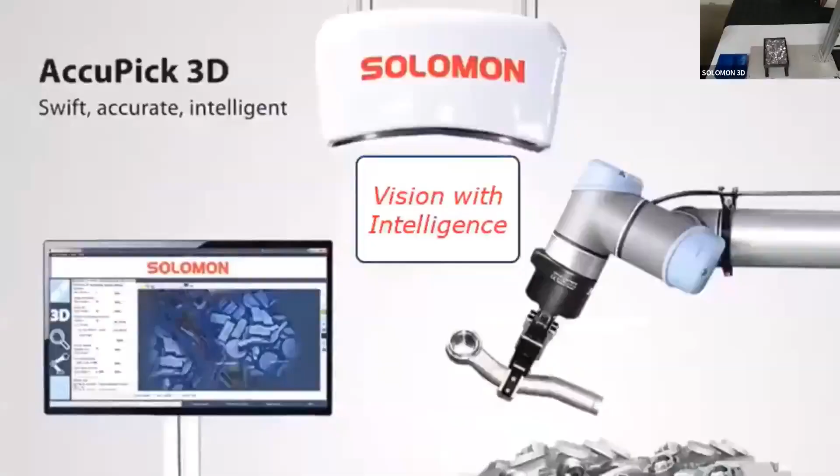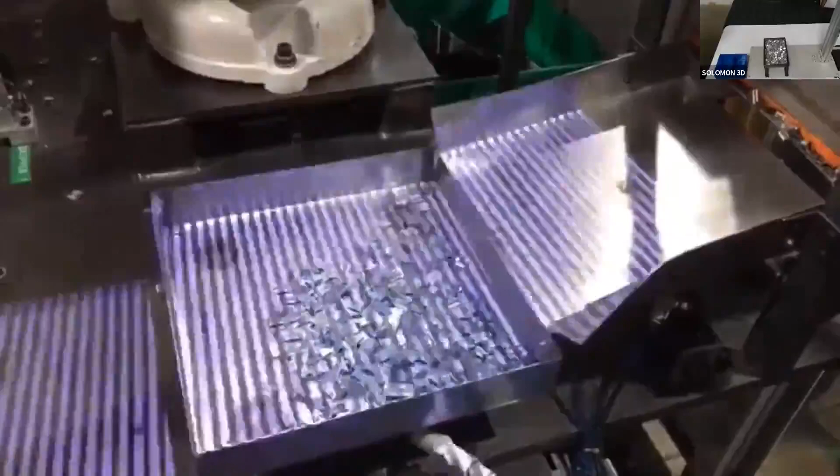As you can see here, we have a shaker system that's feeding parts into a feeder. What's happening is we have a scanner, a Solomon stereo scanner mounted on the top right here. It's a 2.3 megapixel, 12 millimeter scanner, and we have our scanner integrated with a PLC. In the next video, I will show you how the whole setup works.

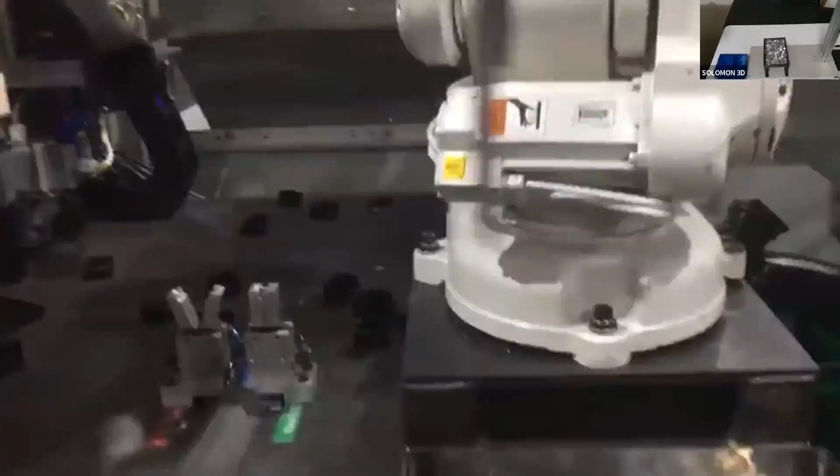Here we have a scanner that's taking a scan for each cycle. These parts are shiny and reflective, and our Solomon Vision system is able to accurately get good point clouds and picking positions. While the robot is out of the way, it's taking images so that we save any downtime with vision.

In this second station, it's basically a station to reorient the part and place it in the plastic mold right there. The part has to be placed in this mold in the same orientation each time. Then the plastic mold moves on to final inspection and is dropped off in the chute.

So right here, I'm going to be replicating some of this today in the webinar and going over AccuPick, our software, and show how we set up this project in our software.

Solomon is a company with 50 years of experience, and our vision systems department was opened in the last 5 years. We've gotten the Vision Systems 2019 Innovators Award because of the ease of use and flexibility, being able to use multiple camera types and integrate with multiple robot brands.

Our software is also able to perform different applications. We are in the energy and power industry, system integration, automation, robotics, and a bunch of other industries. Our offices are located in Taiwan, China, and the US.

So me and my colleagues are based in Los Angeles and Detroit, and we have Thailand and Vietnam. We have headquarters located in Taiwan, which is where AccuPick was initially developed. As you can see here, we have a global network. We have customers all over the world, in Europe, the US, North America, South America, Asia, and we are only growing and expanding with time.

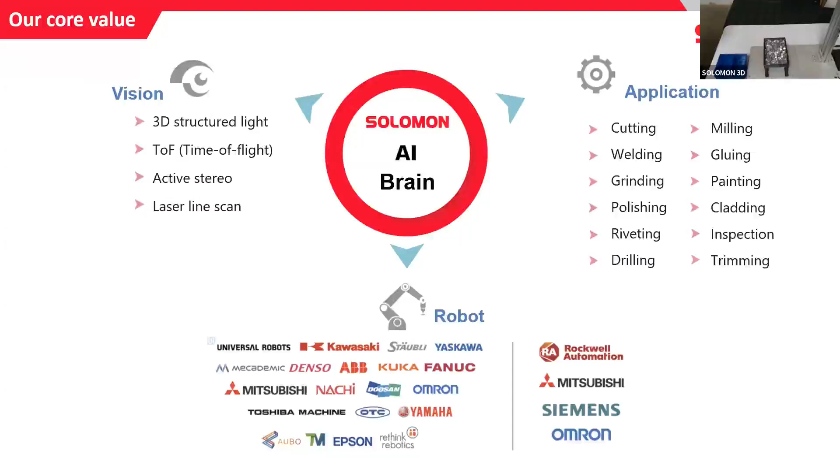In this slide, I'm going to explain what our different applications are. Today, I will be using AccuPick 3D, our random bin picking solution, to show how we did the application in that video for Mergon.

Our other applications are Solmotion, which is our vision-guided robots application for tasks such as gluing and polishing. Solvision is our application for AI-based inspections, such as looking for defects and irregularities. Solscan is just our 3D scanner, our Solomon 3D scanner.

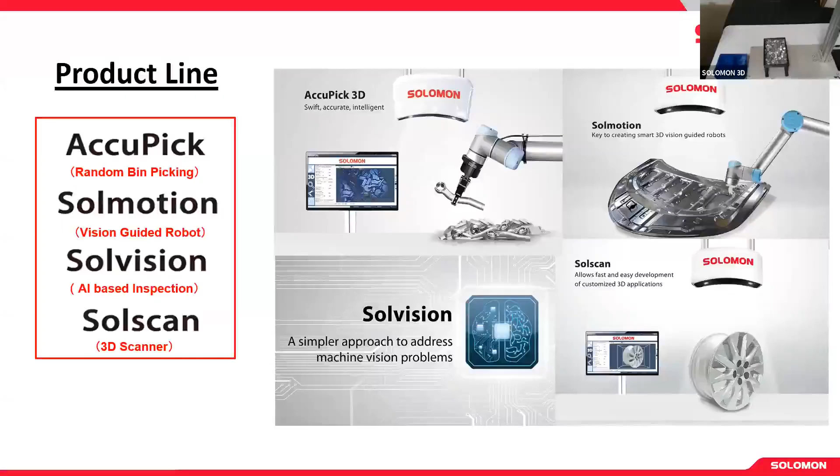So let me now show you our AccuPick interface and get right to it.

Okay, so here is our flowchart of how we set up this project. We start with a capture block. Our capture block essentially is our camera. It's taking in the information, basically capturing the bin of parts and taking in the point cloud, the 3D point cloud information.

Then we move on to the PickDrop block, which is basically setting pick and drop settings for the robot so that we customize it to our needs. Our recognition block is where the heart or soul of our software is, basically our AI. This is where we train parts, basically teach our software what a part is and what exactly we want it to detect, and then train our AI model through deep learning. Our filters block is just where we set parameters to get the best pick point.

And I will go through each of these blocks in depth. Our robot script block is where we set our missions for our robot and waypoints, and customize it to be the best for the application.

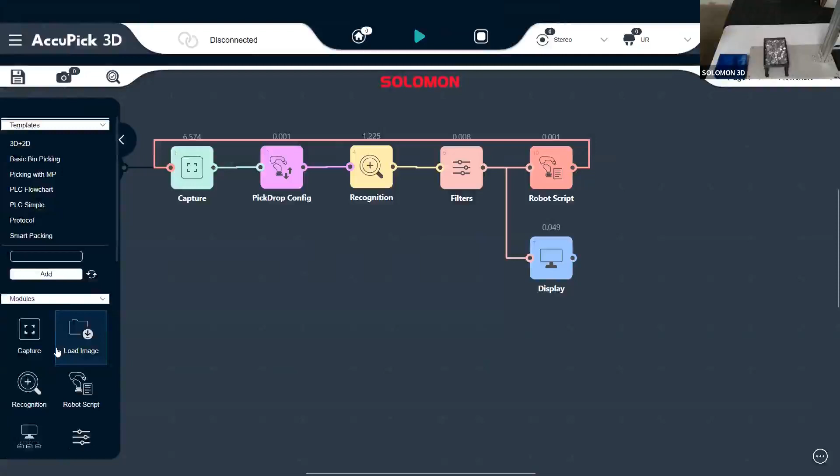A display block is just what we are using for this project, but we have different templates for different applications, such as if you need to use 3D and 2D camera, if you need to use a PLC, smart packing, and we could also customize it by creating our own flowchart.

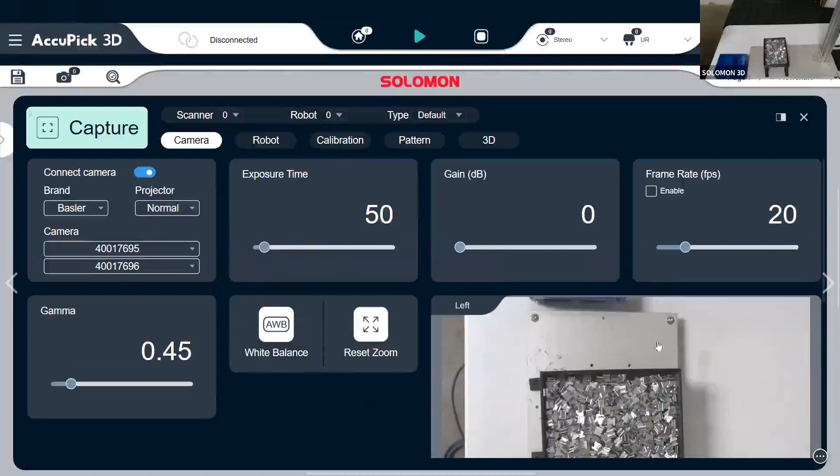Let me go through this block. The capture block is where we connect our camera. Right here, we are connected to our Solomon structure light camera, which has 2 Basler cameras, as you can see with the 2 serial numbers. I've set these values up for our project, as we found this to be the best possible settings for our light settings.

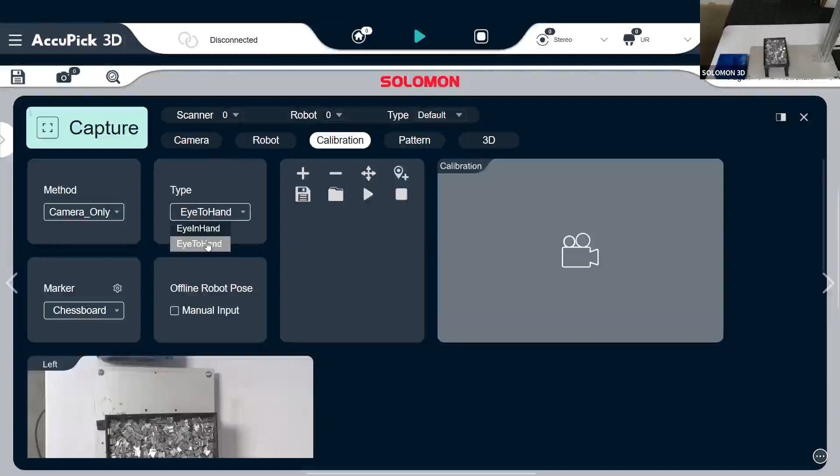Here we could connect our robot and set TCP values. Through here, we can calibrate the camera and the robot. We have different ways of calibration, and we're able to calibrate cameras that are either mounted stationarily or mounted on the robot arm, depending on what the application is.

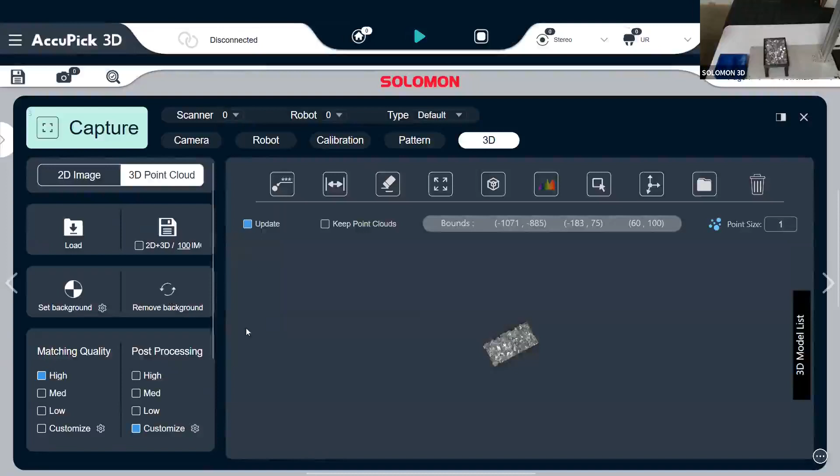Here we change projector light settings for our structure light scanner, and we are able to use a projector light as the light for the images. Here's where we mess with our 3D settings and set 3D acquisition limits so that we limit the point cloud. As you can see here, I limited the point cloud to just the bin so that I don't have anything else in the point cloud.

Let's move to the PickDrop Config block. Here we're able to set pick settings and set it to what we want to select. For example, here I'm setting my priority for picking to pick the highest objects first, then pick objects that are closer to the bin center, and then pick objects that have a small picking angle.

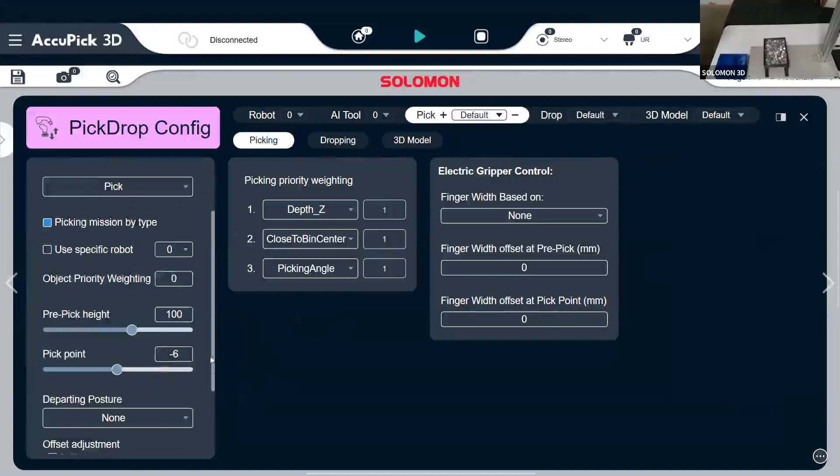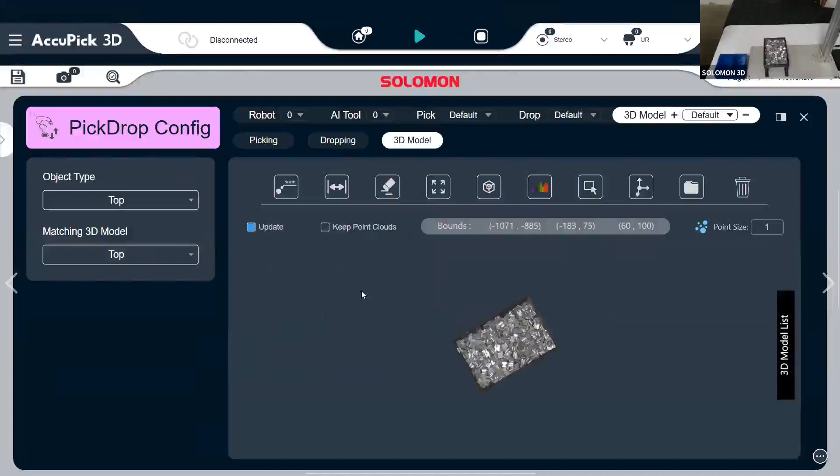If I had to go over every single part of our software, it's going to take a long time, so I'm only going to go through the important aspects. Here's just the drop settings - basically we're able to set how we want our robot to drop the objects after picking it up. And here we're able to work with a 3D model of the part if needed.

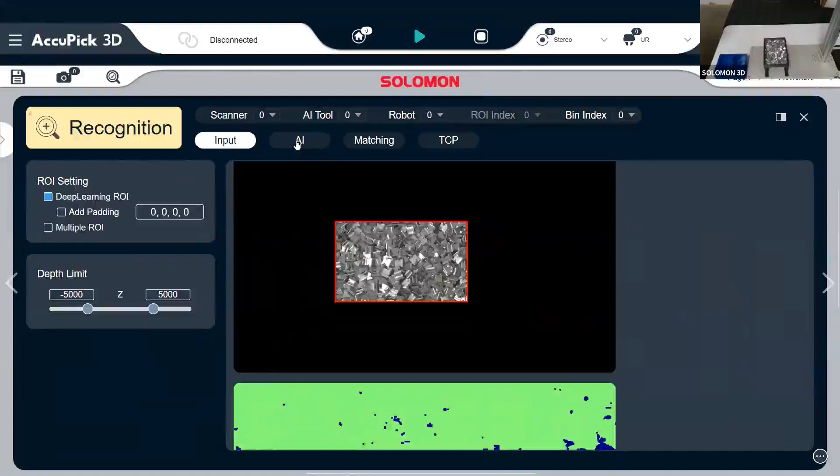Let's go into the recognition block. This is where our AI works. Here I'm able to set an ROI, or region of interest, for the parts, or like where I want to detect the parts. You'll see here this is where we've taken all the images for training.

And if you see how we've annotated parts, you can see we've manually annotated parts here, but for 200 images, this is going to take a really long time. So I'll show you how I annotate just one part.

As I said earlier, this part has two sides to it, a top and a bottom face. For the top face, let me just show you what it is. For example, this part right here is a top face. So I'm just using a polygon tool, and I'm going to mask the image right here.

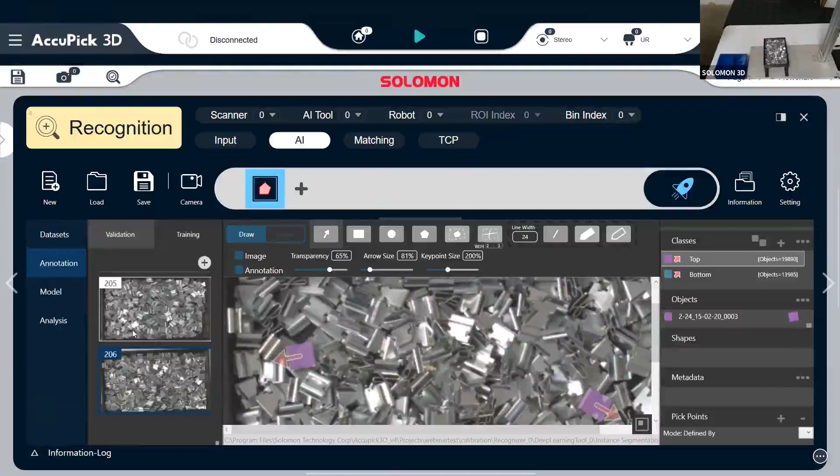So here I basically just mask the part. I want our AI to detect this as top class. Now I am setting a direction angle - this is what I want the orientation of the part to be, which is important because you need a consistent orientation to be able to place the part in the plastic mold with accurate orientation. This is going to take a long time to do for all these images.

So I'm going to show you how we automate these annotations in our software called Blender, which is basically Blender with an add-on, the Solomon add-on.

Okay, so here is where we do our auto labeling tool. This is where we're able to automatically generate annotations.

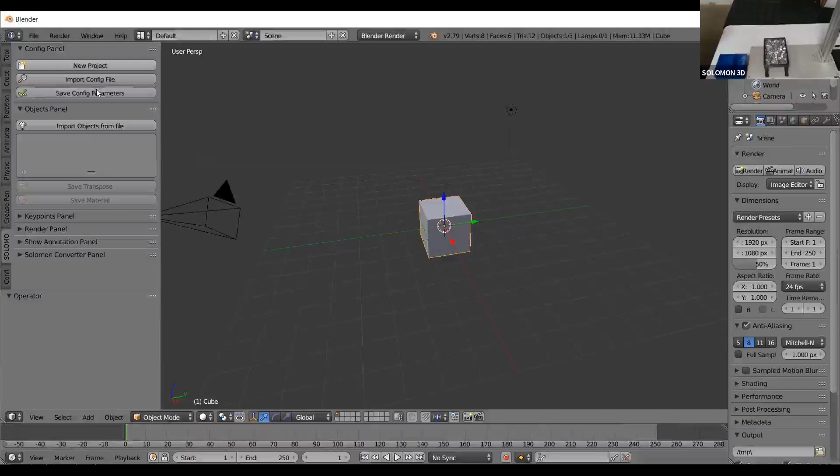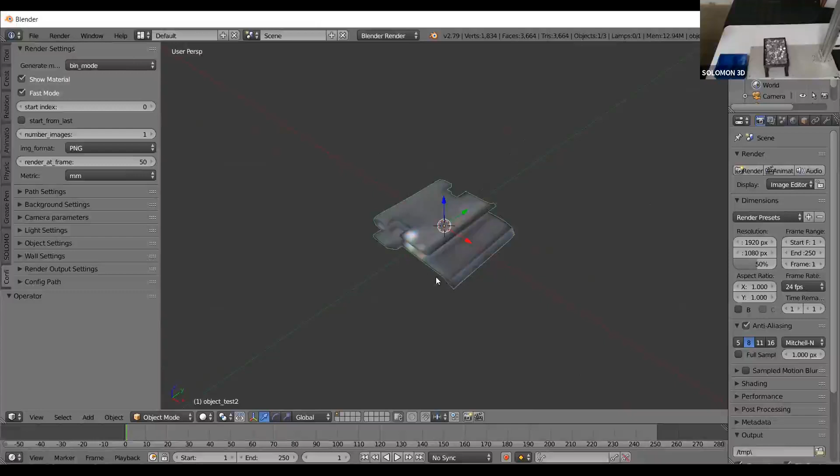So now I'm just going to show you what the part looks like. This is what the part is, and I need to show the material so that I can see what it looks like in real life. This has to be done outside of this project, just so that we save time in the project, so that we save time from showing how to apply a texture.

So let me start with render settings. Here I only am going to generate 1 images for the sake of time, but for the webinar I generated 200 images so that I have a big data set full of annotations for our AI to train.

These file paths are auto-generated, auto-populated when I create a new project. Now the resolution for the camera parameters is based on the background image. Our background image had pixels of 726 into 464, which is why I put them here. Our lens is based on the camera lens, which is a 2.3 megapixel, 12 millimeter camera.

So our sensor width is again from, so our cameras within our structured light scanner are 2 Basler cameras, and the sensor width for these cameras is 9.2 millimeters into 5.8 millimeters. I got that from the Basler product page for that camera. This value here is the working distance, so from the camera to the bin, and it is 864 millimeters. All of this information is important to get a good rendered image.

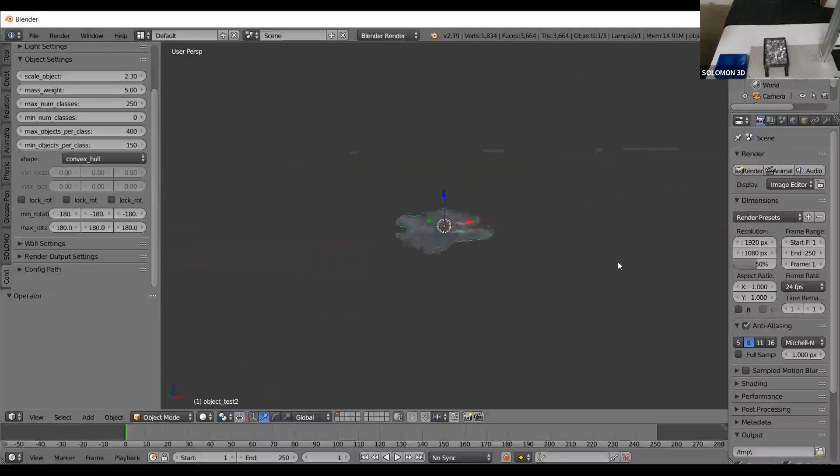Here, I'm going to go through object settings. So I am scaling the object because we created a CAD model of the part as we did not have a CAD model. So in Blender, you need a CAD model, but you can also create a CAD model of the part, and we just had to scale it up so that it has the same dimensions as the real life scenario.

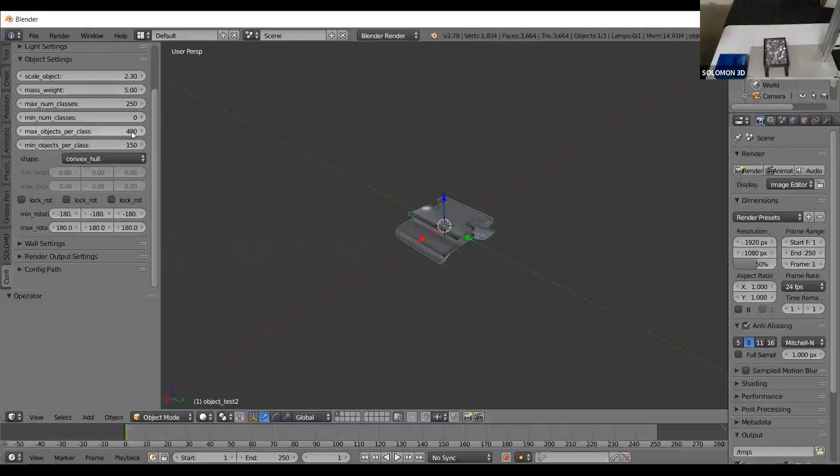I'm going to generate a rendered image. We're going to generate between 150 to 400 images per class. Each class is basically a top side, which is this side, and a bottom side, which is this side. So just so that we have so many parts in the bin, which is what in a webinar I've packed a bin full of parts, it's going to look similar to what I've set up for a webinar.

I'm not going to restrict rotation in the X, Y, or Z because we want the part to have rotations that depict a normal random bin full of parts.

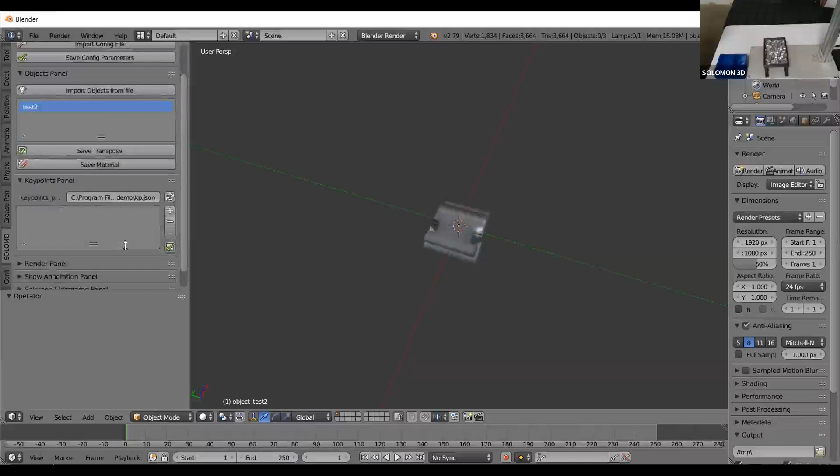I'll show you how I define our walls for our bin. I'm just going to select this area and then finish setting up a wall, and that's all you need to do. We can skip over these settings and move on to setting key points, which is basically how we set direction angles for our annotations.

As I told you earlier, this is our top face. So I'm going to set key points that are in line, that are straight, essentially, so that I get a good direction angle. And on the other side, I'm going to do the same thing.

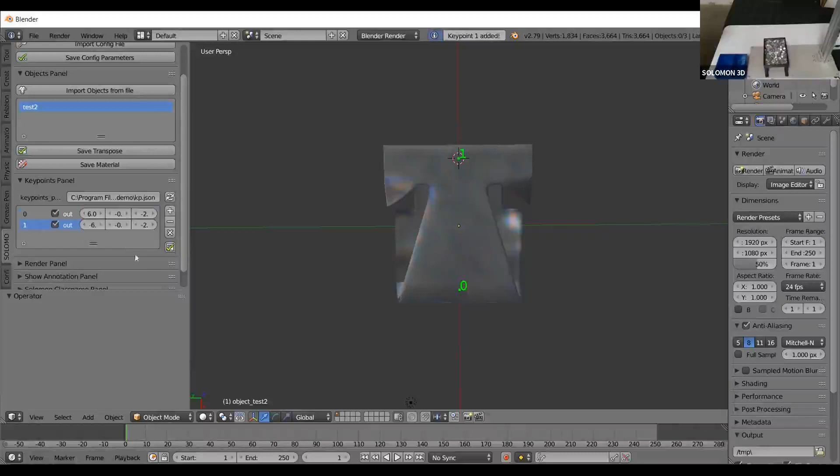All right, so let me save that. And now let me show you how I create the classes. So I'm just going to call this a top class and a bottom class.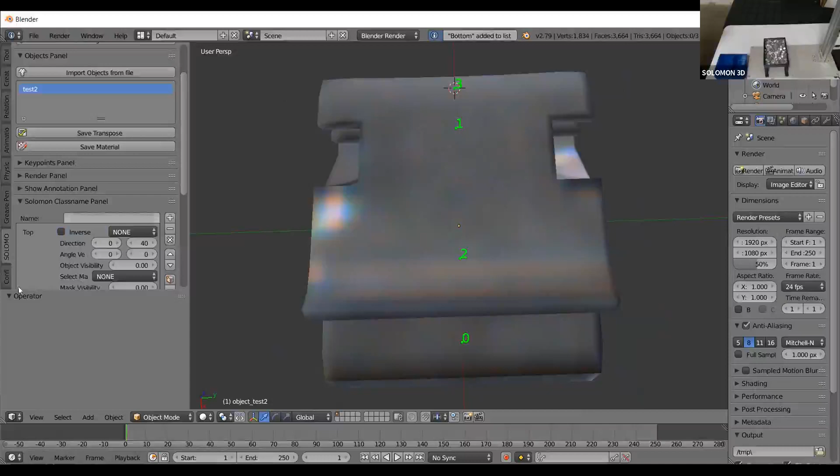So now I'm going to set this direction from 0 to 1 as our annotation direction. That's basically our angle vector here, 0 to 1. And then for the other side, it's going to be the bottom side. The direction is going to be between 2 to 3. So that's what I'm going to do right here.

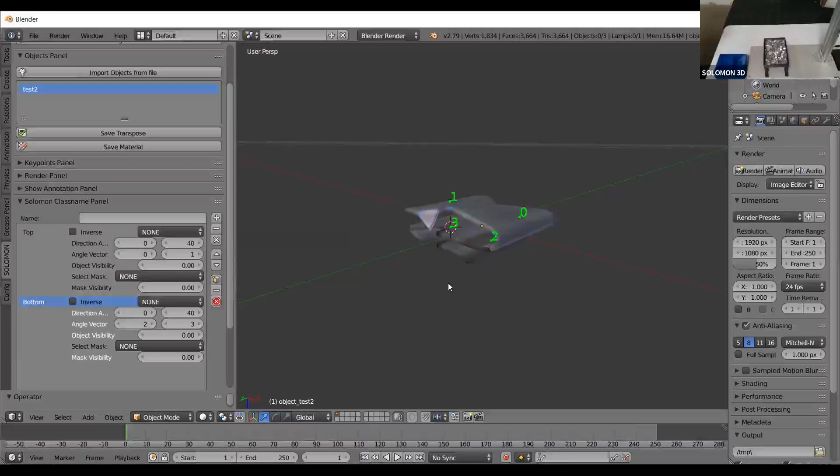So our plane of axis, basically the direction axis that's coming out of the part in the top face is the Z, but inverse. So I'm going to select Z inverse, and in the bottom face, it's just the direction that's coming out of the part, as you can see, is Z. So I'm going to keep it like that.

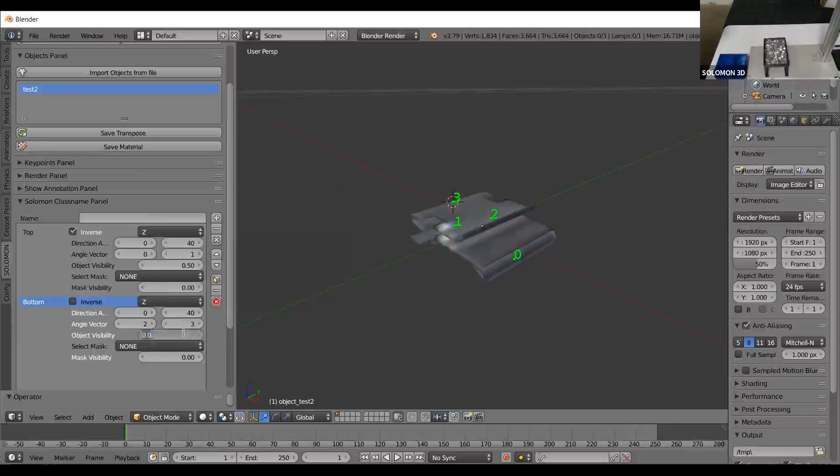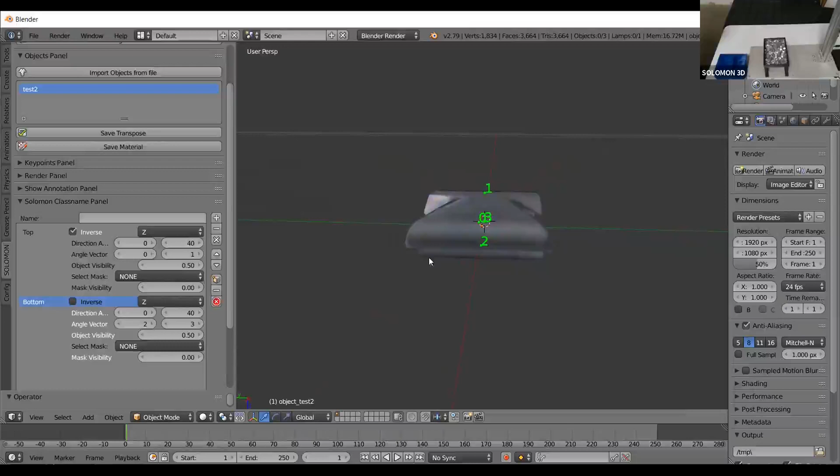So I'm going to set our object visibility. What our object visibility is, is how much of the part you see in the rendered image. Something like this would be 100% of the part, which would be 1. 0.5 could be something like where just half of the part will be seen, like right here. Or it could even be something like this, where this could be 0.5 object visibility, where only that number of 2D points of the part visible is what object visibility means.

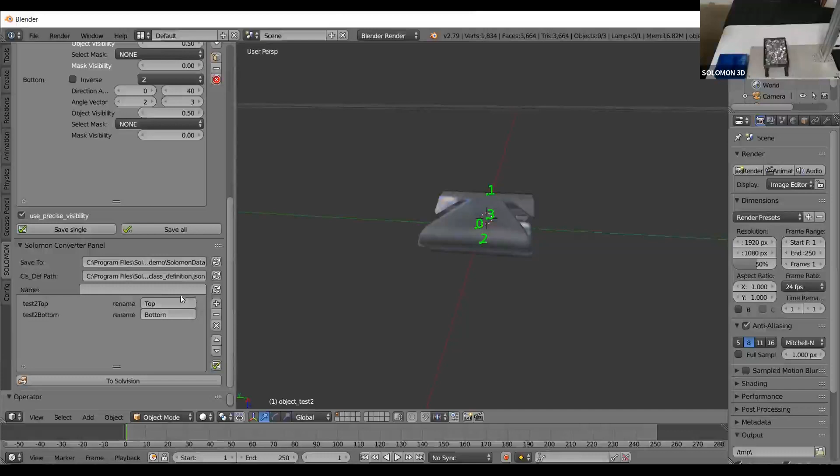So now that I'm done with this, I am going to save these classes, and I'm going to just show you what I'm trying to do. I'm just trying to rename classes so that they are easier to comprehend and understand. And this section right here, let me show you in a bit. So let me first animate and show you what a bin full of parts looks like right now.

This is a bin full of parts, and let me show you the rendered image. This is what the rendered image looks like. I messed around with the light settings to make sure that these images look very similar to a real image. So this actually does look like a real image, and I'm good to go - I don't have to change any settings.

I'm just going to show you what I mean - so when I click on generating, I'm basically going to generate images in a folder. So let me just say yes and start generating some images.

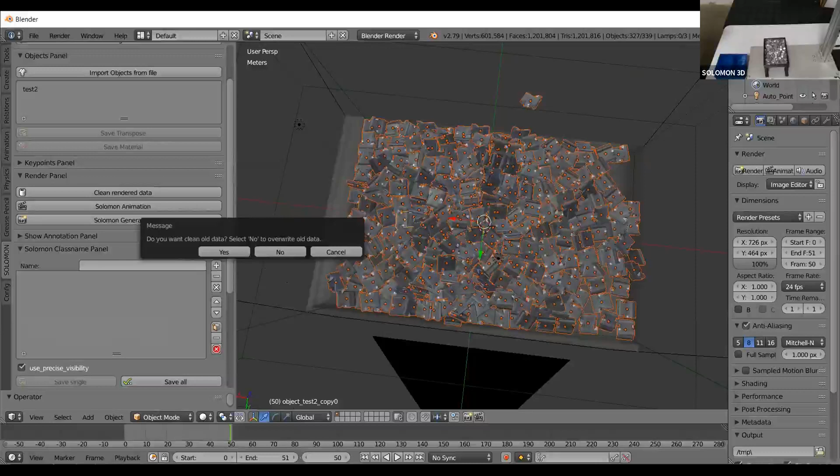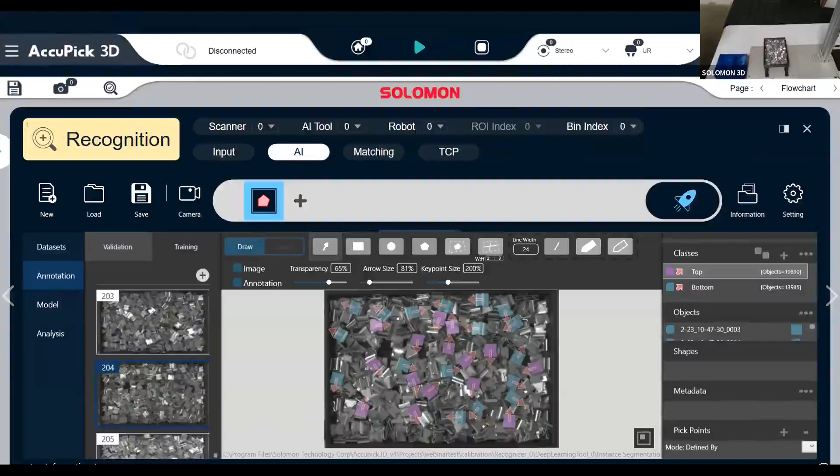I can just merely move on and show you how the images look like in AccuPick. So in AccuPick, these images that I'm showing you right here are real images, but the generated images are something like this.

As you can see, we have so many annotations - these are all automatically generated. As I told you earlier, I generated 200 images with annotations for both the top and bottom classes. This helps because this project auto-labeling only takes about an hour or two, whereas you'd be spending time manually annotating all these parts.

So the next step would be to start deep learning and training our AI model, so that we teach our software what a top class and a bottom class is, and what the direction angles should be for these classes.

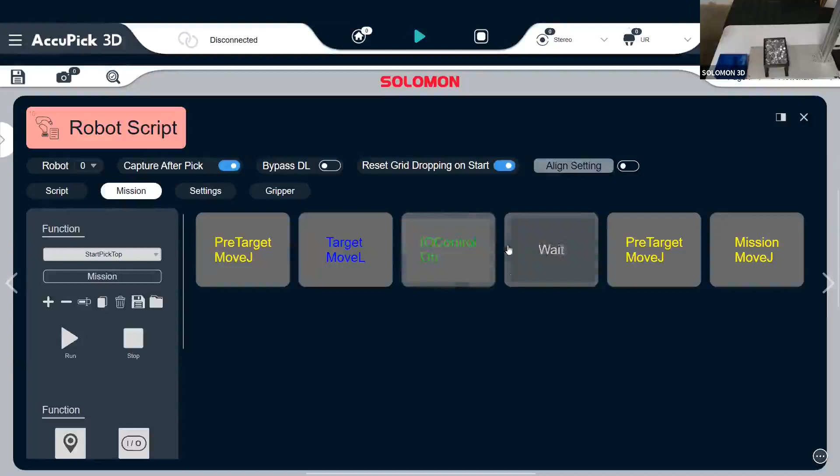So the robot moves 100 millimeters over the part, and then it goes and picks the part, where it moves right straight to the part, and then our suction cup turns on the air and picks it up. Then there's a wait time to let it pick it up and make sure there is contact, and then it goes back to the pre-target and moves out of the way of the camera.

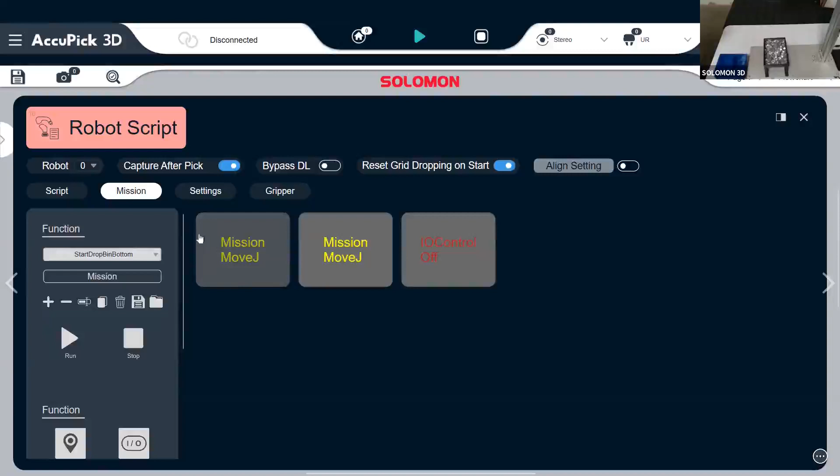It's the same essentially for the start pick bottom. Our drop missions are just going to a specific bin - so dropping on top is dropping into one of the blue bins that you might see in the video feed, and the drop bin bottom is moving to the second bin and dropping it off.

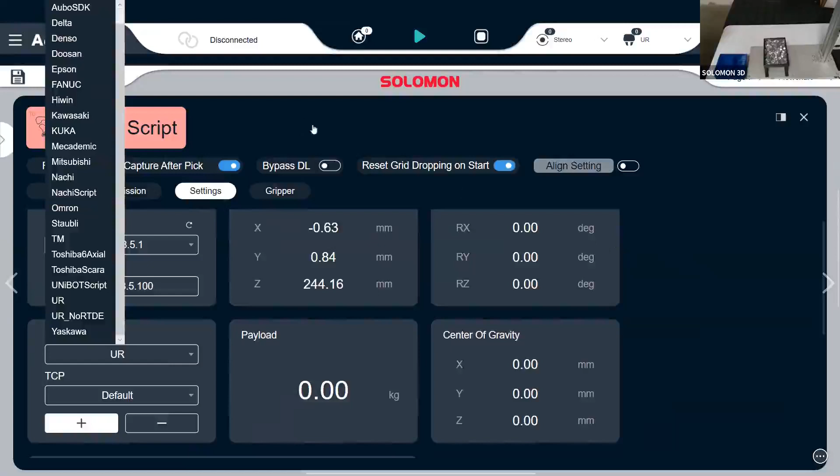Let me also show you the different robots that we're able to integrate with. We're able to integrate with ABB, Denso, Mitsubishi, Nachi, and a bunch of different robots. Here today I'm using a UR10, and the scanner that I'm using is a Solomon 2.3 megapixel 12 millimeter lens scanner.

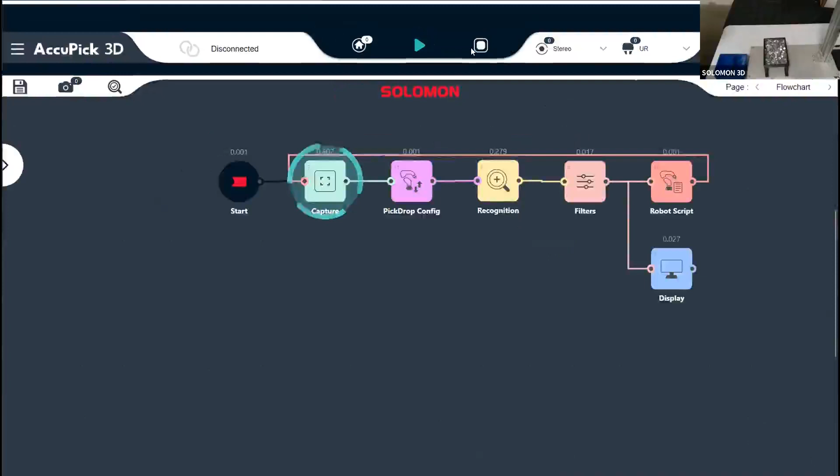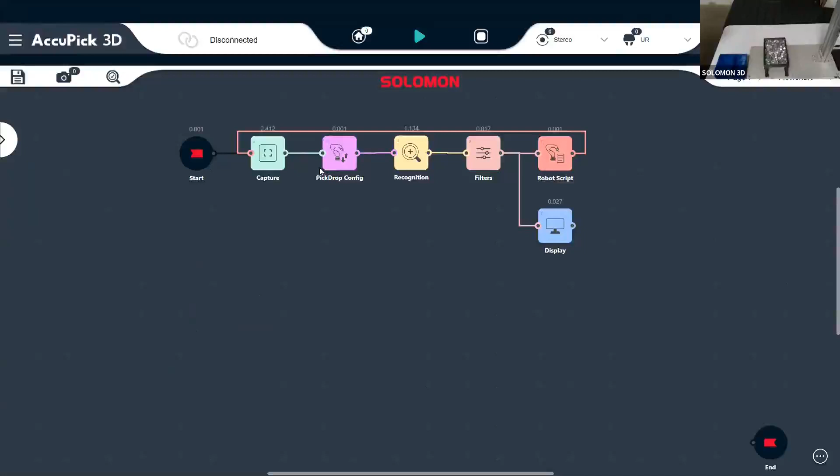All right, so let me show you essentially what this looks like. Right now I was just trying to show you how I'm able to scan and recognize without actually moving, picking with the robot. So this is what it looks like. I'm only making it pick one part or recognize one part per pick, just so that it's easier for processing time.

Now I'm going to show you how the flowchart looks when I play it, which is basically going to start running the robot mission. So we start with the capture block where it takes an image, and then this is recognition. And now, as you can see, the robot's going to pick up a part.

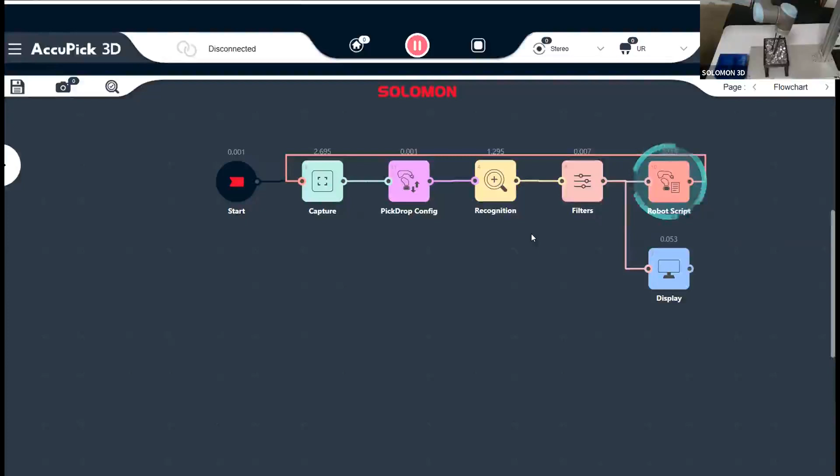Right now it's picking up a top class, and now let's see what else - it's going for a bottom class. This is how a flowchart works.

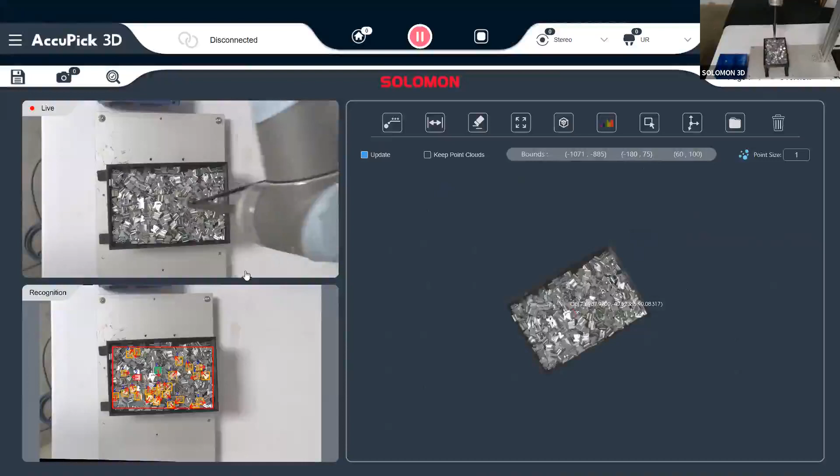Let me show you what it looks like in the live feed. A pick point is generated in every cycle.